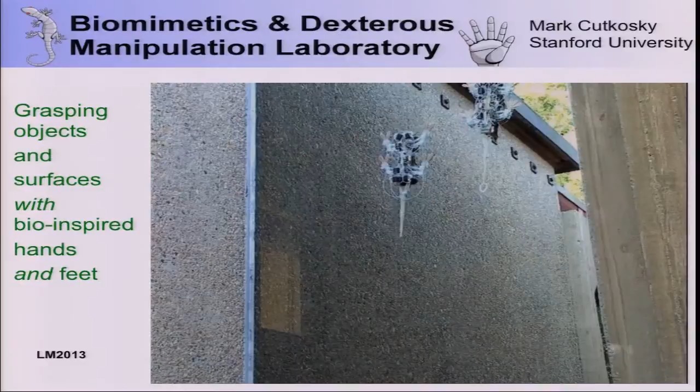Good afternoon everybody, it's my pleasure to kick off the afternoon session. I want to talk today about hands and feet. The interesting thing is that when you're using feet for climbing, it's pretty much the same as hands. It's all about controlling contacts and internal forces, which means you have to do tactile and force sensing, which also means you want to use compliant structures and materials to help conform and control those forces. These are themes that will come up. I don't have time to talk in detail about any of this, but I wanted to show you some recent work we've been doing on hands and feet.

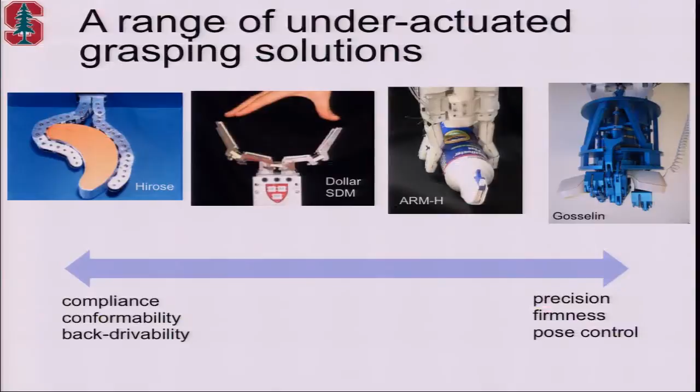We've been involved in some hand projects lately with under-actuated hands. When you look at the spectrum, there are a number of them ranging from very compliant and conformal ones, like Hirose's hand on the far left, to ones that have rigid links but are under-actuated so they can close around an object and hold it precisely. We've also been working on a couple that are in the middle, like the ARM-H hand. I'd like to touch on three that we've been working on.

The first one is with Hannah Stewart, who's in the audience there, and Shiquan, also working with Oussama Khatib. Oussama's already told you about the robot, and we've been trying to convince him that he should call it Ariel, but he wants to use an acronym, so you can help us. I'll tell you a little bit about that hand.

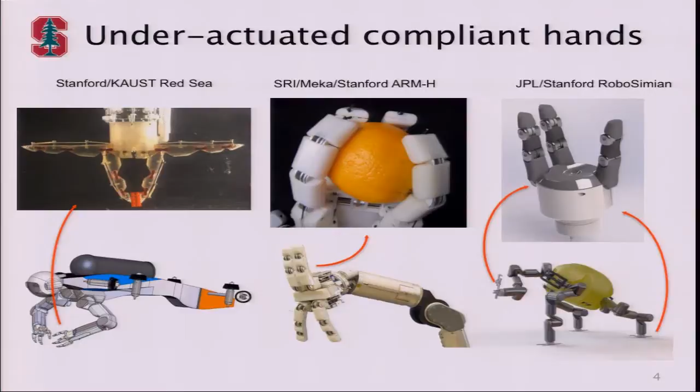Also, the ARM-H hand that we did with SRI and Meka. And then the last one on the right is a hand that we have been working on with JPL for their entry in the robotics challenge for DARPA. Interestingly, they call it RoboSimian. It's sort of an orangutan robot, and the hands are feet.

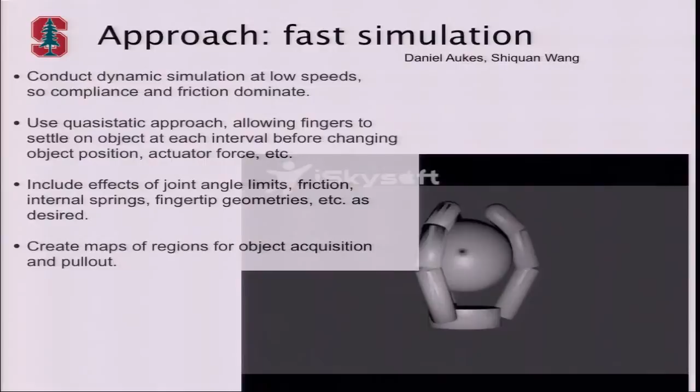The approach we've been taking for our hand design is to do fast simulation at low speed. It's a huge search space - how many fingers, what their properties are, and so forth. We want to include important things like friction, joint limits, and so on. We were able to build up regions of things like: under what circumstances can this hand successfully grasp an object? What is the effect of changing different finger stiffnesses? How much force can we resist if we pull out in different directions? I'll show you a couple quick examples.

This is the ARM-H hand on the right. One of the interesting features is that it has electrostatic brakes, shown down here. They're laminated layers put up at a high voltage so they squeeze together and lock the joint. Brakes are nice because they're much more compact than motors for the same torque. It allows us to have a single motor for each finger and yet still have some of the dexterity you might otherwise expect from a fully actuated hand. This video shows the ability to grasp by first releasing and then locking up the brake so that it sucks the object right in.

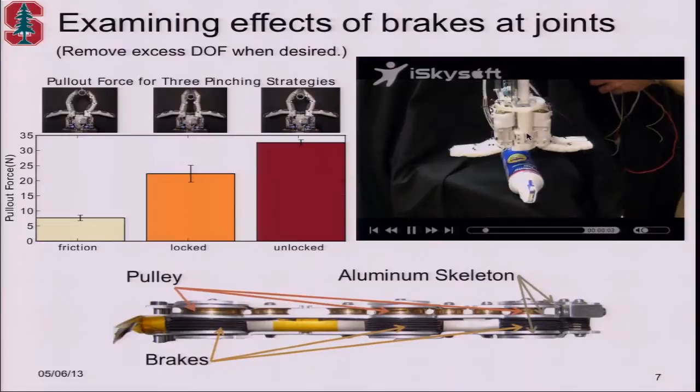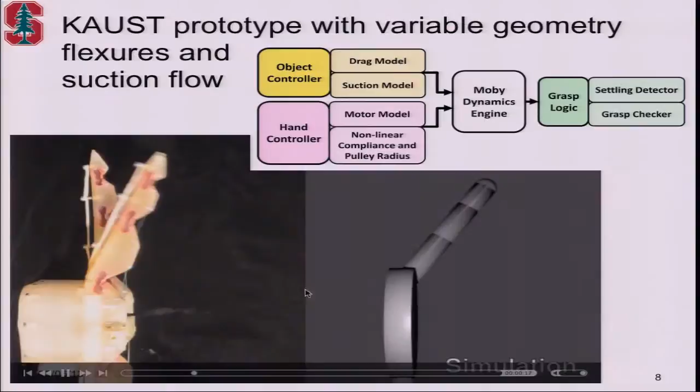The next slide I want to show is a hand that Hannah's been working on with a couple of other students - Shiquan has been working on the modeling. It uses flexures because it's easier to make them waterproof. The modeling shows the advantages of having a non-constant geometry of the tendons so that we can get the fingers to curl in.

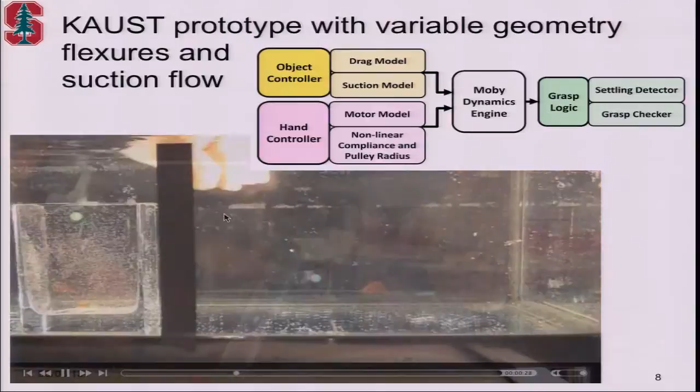The other thing that turned out to be a big help with this hand is adding suction. When you're trying to grasp something underwater, the motion of your hand pushes a little bit of water ahead of it, which tends to push away the very object you're trying to grab gently. But if you pull a little bit of suction - this is not like an octopus sucker, it doesn't require making a seal - just a very gentle suction can make all the difference in terms of being able to grasp soft and slippery objects.

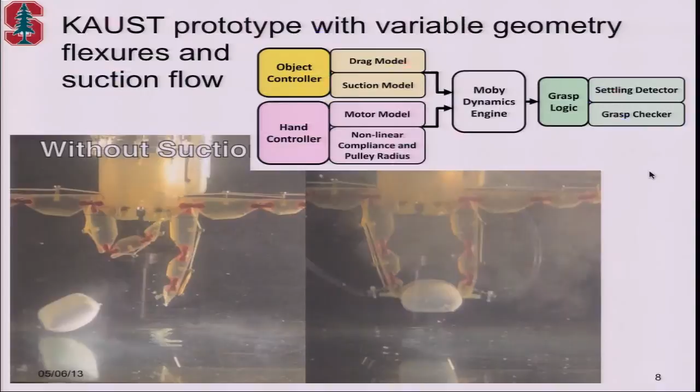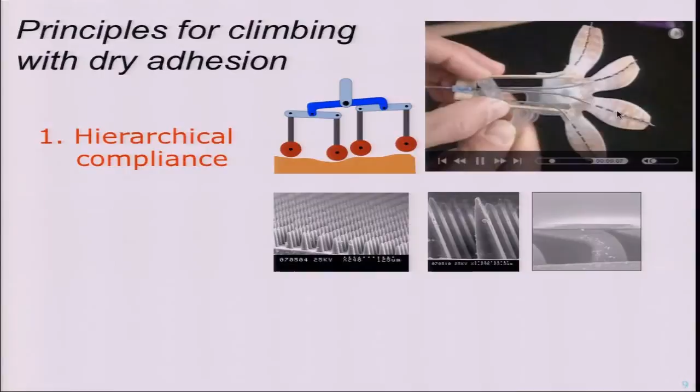You can see here that the soap bar is just a lot easier to grab with a little bit of suction. Feet are almost the same thing. Once again, they're under-actuated. They have to conform to surfaces and distribute forces. In just a couple minutes, I want to say a word or two about that.

Even the gecko has to worry about controlling internal forces. That's why when they're going head first downhill, they have to turn their feet backwards, or otherwise they would fall off.

So what we've been doing most recently with adhesion is what I call dynamic surface grasping. My inspiration here is the colugo, gliding and grasping a tree. We've been working with a number of investigators, Vijay Kumar's group at UPenn, and most closely with Sean Humbert at Maryland.

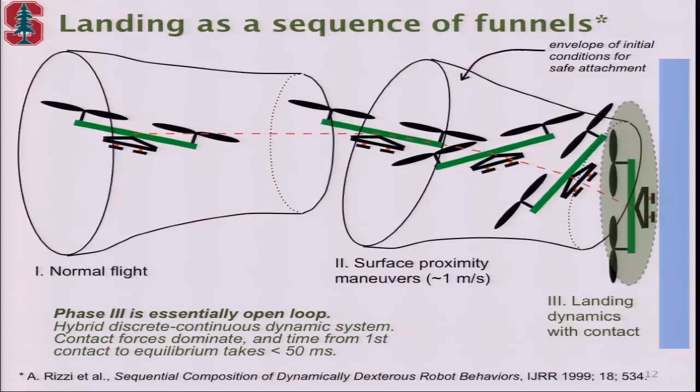On trying to get quadrotors to land and perch on walls and ceilings. Their problem is to control the quadrotor in phases 1 and 2. Ours comes in phase 3, the final stages of this flight. As soon as you make contact, those forces really dominate the dynamics. It's very fast, about 50 milliseconds.

And so we need mechanisms that will let us align the quadrotor and grip. Here's just a quick video of one.

It's too bad I need this. I should show you the sound because it sounds like an enraged mosquito. It's okay, never mind, there we go.

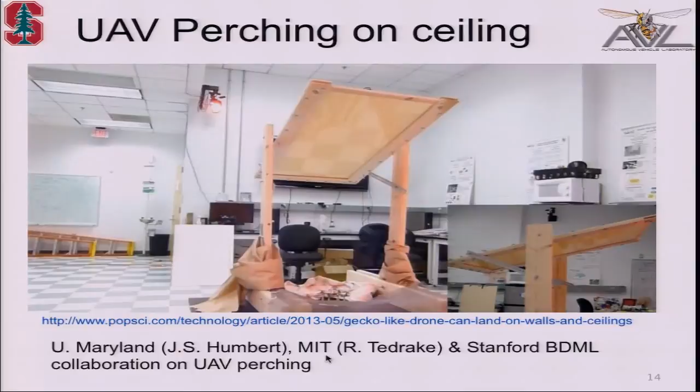The only thing I don't like about this video is it makes it look easy, like the thing just has chewing gum on its head. But actually, it's a fairly complicated process.

We come in, we may be misaligned, so we have outriggers to align, and this means we want a small polar moment of inertia. We absorb the excess kinetic energy and use that to compress a structure internal to the mechanism. That's what loads the adhesives and then allows these adhesives to grip.

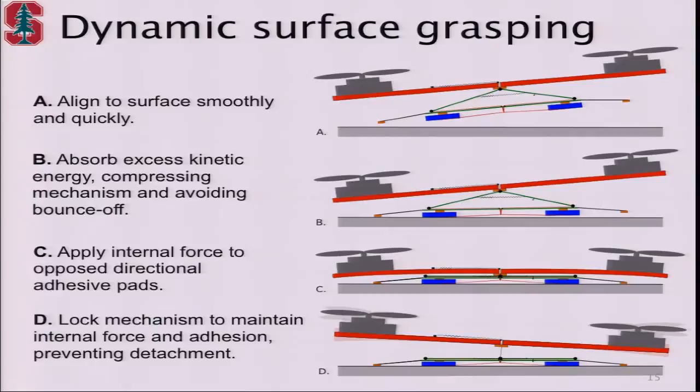And then at the end, we have a little latch. We release that, and we have enough energy to pop off, and you can start flying again. We're doing a lot of work with dynamic modeling, verifying that these things will grip under the circumstances that we predict they will, and also trying to make that envelope bigger.

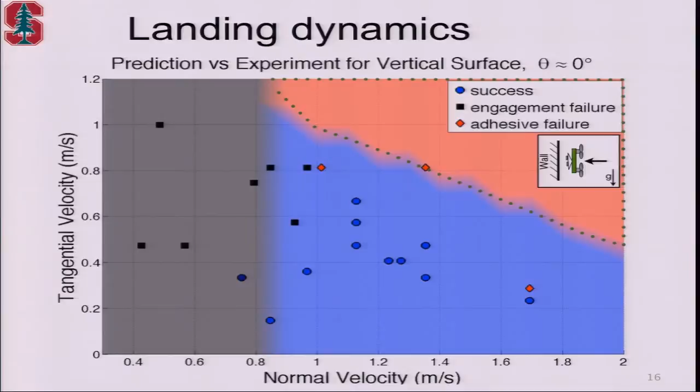In particular, let's look at this part of the envelope in the upper right. That's adhesion failure, one of the modes. And that really requires looking in some detail at what the adhesives are doing.

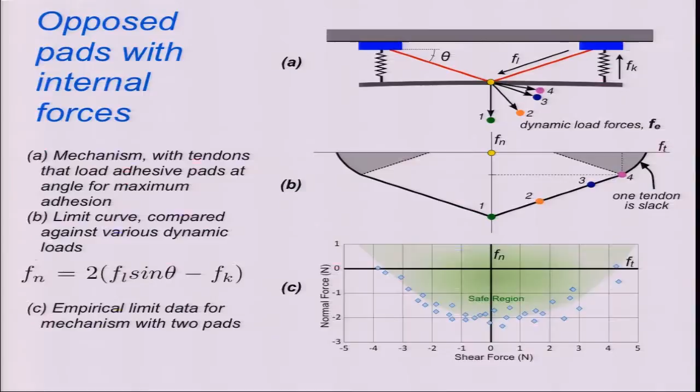So we have two opposed pads here, and we're pulling on them with tendons, and that means that we have a kind of a limit curve, shown by the blue empirical dots, the range in which we can pull forces and still sustain the contact. As you can see, the limit in the best case is around 2 newtons for this little gripper.

And that has interesting implications for the springs. It turns out that it means there's a big reason to use nonlinear springs to get maximum energy absorption in a tight space. There's not going to be time to go into detail on that.

Okay, let me finish with one last thing. How do we grasp objects in space? So we have a big problem with space debris. There have been satellites destroyed by space debris. There's the movie Gravity that just came out, in which that plays a role.

When I first heard about this, it sounded like science fiction, and I vaguely remembered that there was a James Bond movie in which the bad guys had come and indeed they had grasped an object in space. What we would like is something a little less cumbersome and ferocious looking than that.

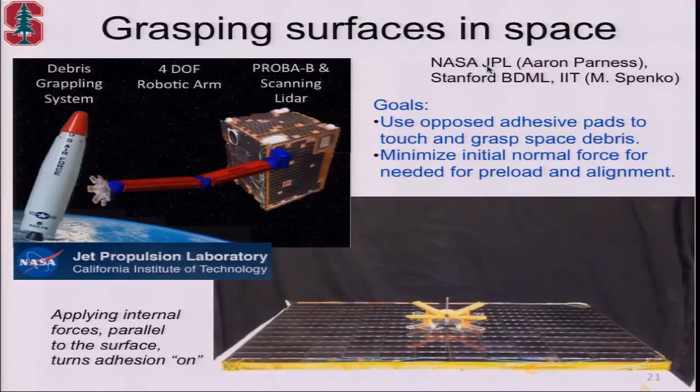The idea is that you have a satellite with an arm and with some of these gecko, I don't know if they're feet or hands, whichever, that grasp the object and allow you to reel it in. I should also point out that Allison's group is working on this, and we've been collaborating a bit with them as well as with Aaron Parness at JPL on space gripping.

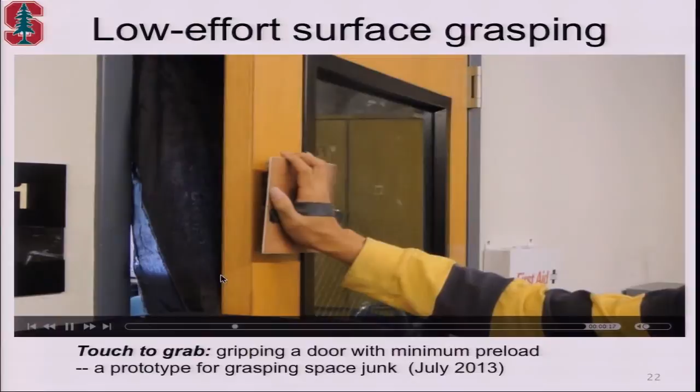And this is the last slide. The real trick is that you want to grasp things with very low force, because just like trying to grasp things underwater, you don't want to push them out of the way. So here they are in space. You want to latch onto that surface and grip it. You can't push it, because then you just send it off into another orbit and things are worse than ever. So grabbing with very low effort is an important thing, and this is demonstrating a low effort gripper.

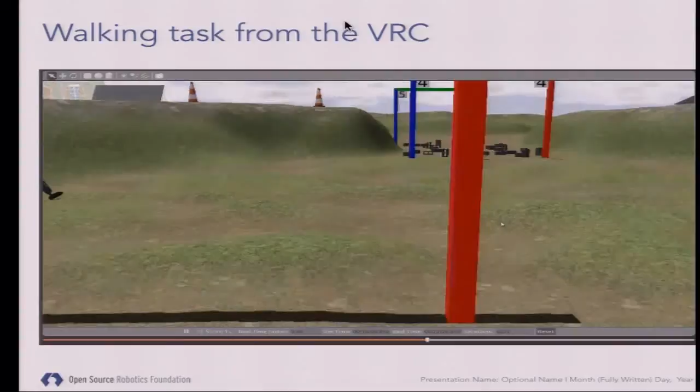This is just a rendering from some of that. There's a nice rubble pile up there to avoid.

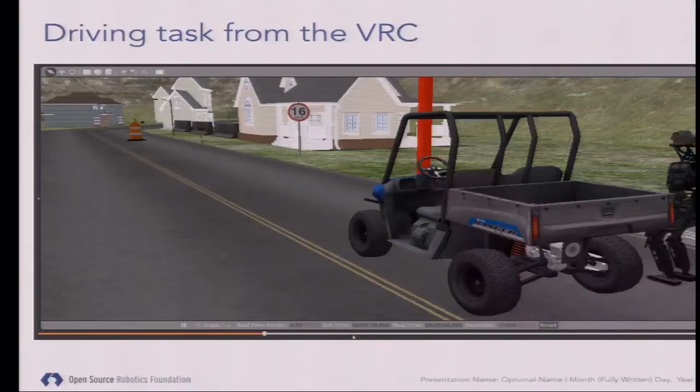I'm going to skip through because I'm going to do a live demo. And this is a fun one. We hear a lot about robotic cars, but here the task was to put a humanoid robot inside of a car and drive it.

Right. It's probably the easiest way to do it. This is how I get into my car. I don't know about you.

Say there's a fire that breaks out, that's a time critical situation. Say you have a water truck, it's not an autonomous water truck, but you'd still like to be able to use it, if say there was radiation as well. There were a lot of fires at Fukushima, so firefighting is one of the things that they were focusing on. So that's kind of the justification for this type of thing, even though it seems a little silly. It is cool, but it's also potentially useful.

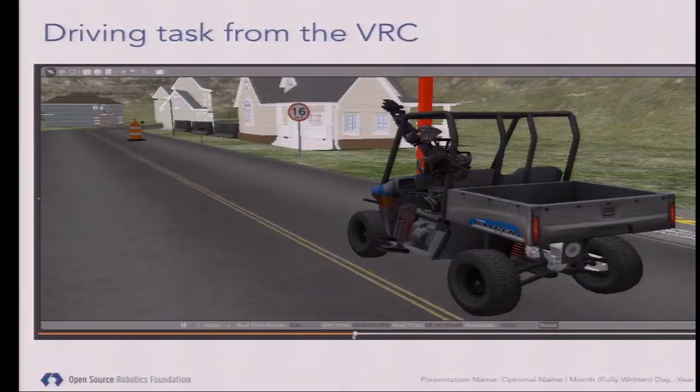So these are some scenes from the VRC, the Virtual Robotics Challenge. And now I'm going to talk a little bit about Gazebo, which is the simulator. That's what I work on.

So one of the things that I'm working on is adding support for more physics engines. It initially used Open Dynamics Engine. We're adding partial support for bullet physics, and we're also adding support for SimBody, which is from Stanford, and DartSim, which is from Georgia Tech.

Now, key buzzwords for the physics engines is using Featherstone's algorithm, which can give much more accurate solution of the constrained rigid body dynamics. And also regression tests. We're putting in tests to verify that all the physics engines are working properly and that they all have the same interface.

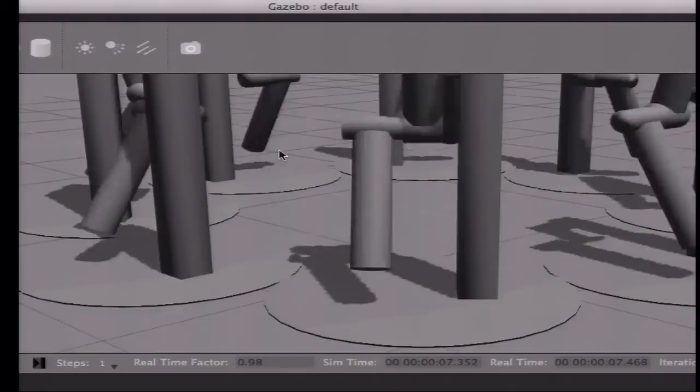Traditionally, you've needed Ubuntu with a GPU to run Gazebo. We have partial support for Mac, which I'm going to demonstrate right here. Okay, let's see if we can full screen that.

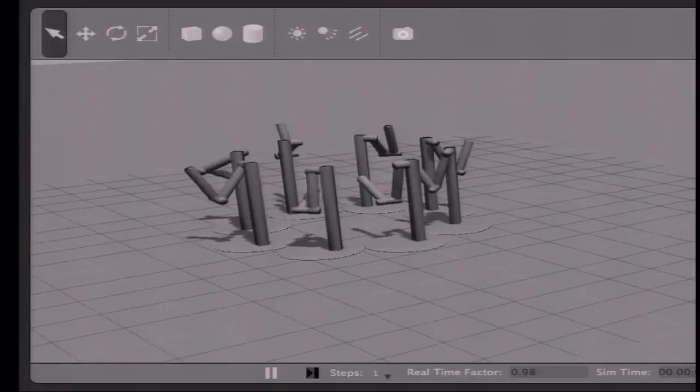So this is just, I see this all the time, an array of double pendulums swinging around. It's pretty normal. And in your scientific quest for knowledge, sometimes you just have to try things out.

Morgan wrote this script.

So yes, we have partial support for Mac OS right now, which is the point of that. And now I'm going to show you a demo of our cloud, some of our recent cloud interfaces, which are very cool. So because using Ubuntu, using these high-power Ubuntu machines, not everyone has them, and so forth. But with the cloud, you can get a machine.

Can't talk and demo at the same time. Whoa, that's not good. That's not good either. Okay, we'll approximate it like that.

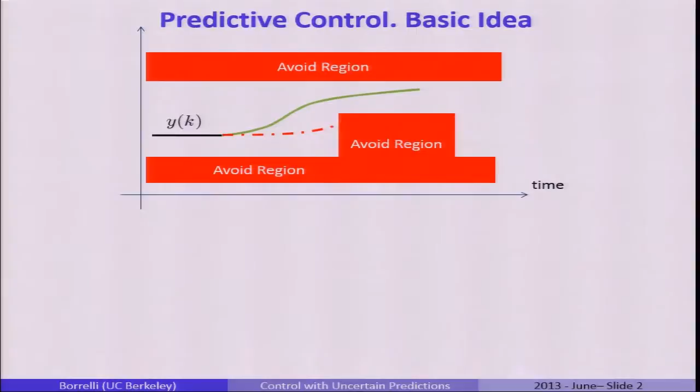So we study predictive control. Very simple idea: you want to control a trajectory of a system. You have some regions you want to avoid because of the inertia of the system, because objects are moving. You want to make a forecast. Otherwise, instead of following the green trajectory, you follow the red trajectory and crash with the obstacle.

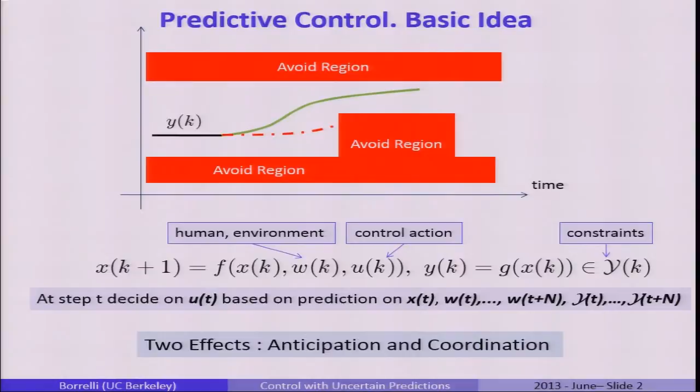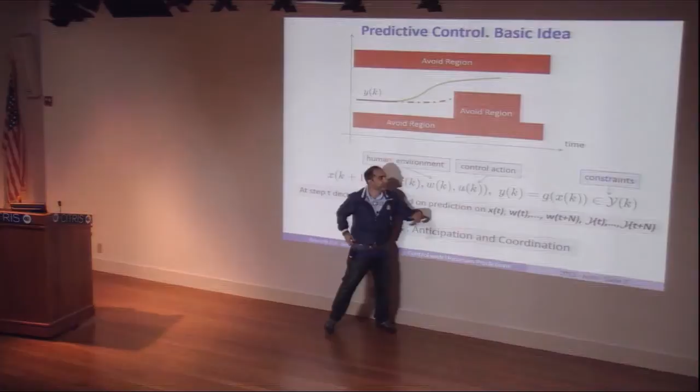So the most simple mathematical formulation of this: you have a dynamical system, which has a state. You have control over certain inputs, and there is environment and humans around you that you don't control. So at time t, you want to decide which control action to take based on forecast of the environment and the humans around you. There are predictions in there, and the conjecture is that because of the inertia, because of the dynamic scene, without predictive control you are not able to solve complex tasks. So this is my first message: model-based systematic control is the choice for complex systems.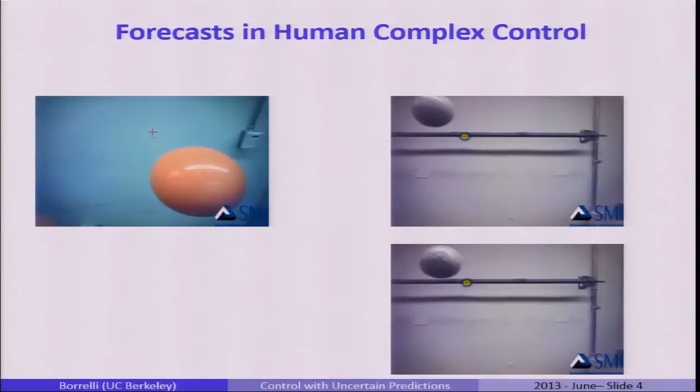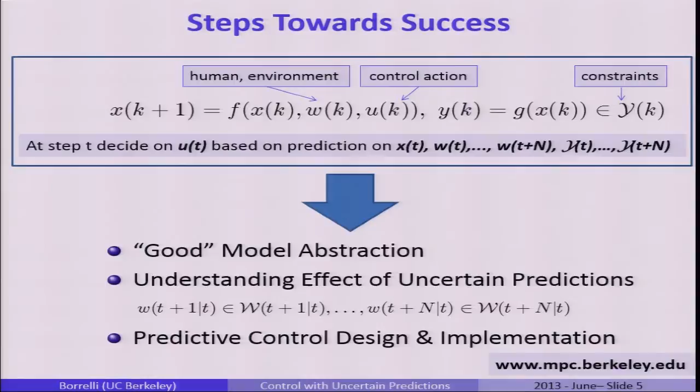Okay, moving forward, what do we study in my lab? What is a good model abstraction for doing predictive control? What is the effect of your forecasts? Your uncertainty about the future belongs to a given set. You have probability distribution functions, and you want to understand what is this effect in feedback, and how do you design a predictive controller. I'll spend one word about this.

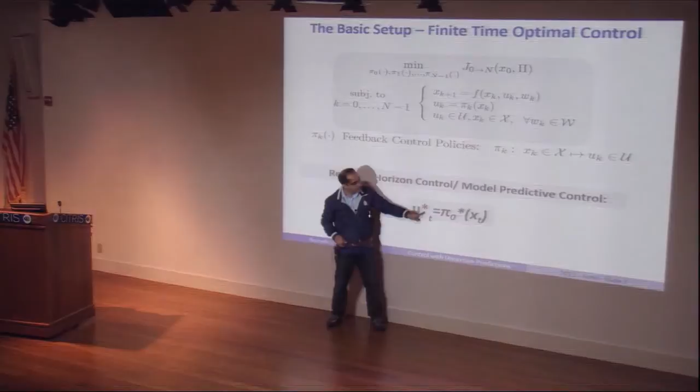The simplest formulation, I don't have a pointer here, but you basically are looking for a set of feedback policies over a horizon, pi 0, pi 1, pi n, that minimizes certain costs, respects your system dynamics, and satisfies your state and constraints. Okay? So the simple predictive controller, receding horizon controller, look-ahead controller, is basically telling you: take your state, apply the first feedback policy you have found, this will be your best action, and repeat and resolve the problem again.

So second message for today: this simple concept, and many of you have seen in one form or another running this, can be implemented and works. Today, for instance, if you have a simple steering control problem, you want to steer and apply differential braking to a vehicle, and you have a bicycle model, you have uncertainty about the longitudinal speed because the driver is acting on it.

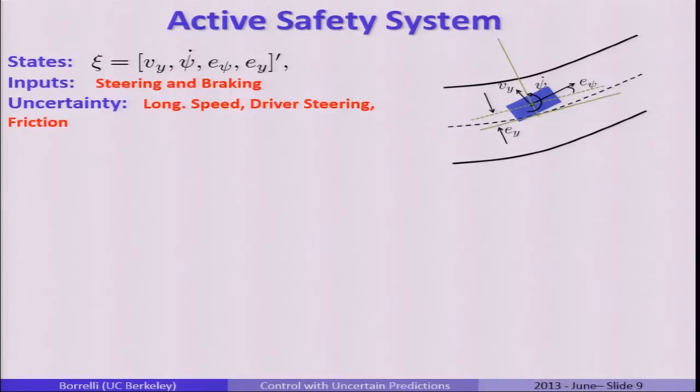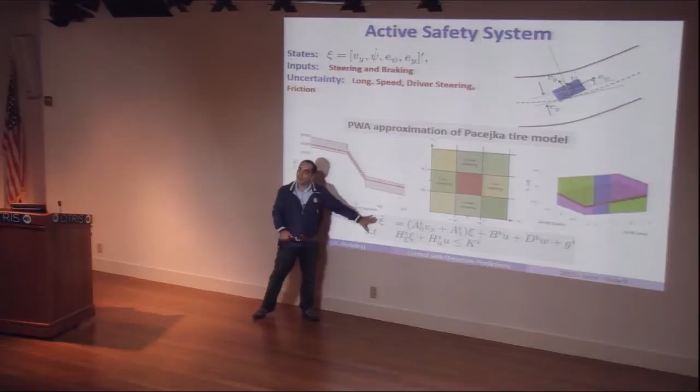You have uncertainty about the driver steering, so you have an additional action on top of what the driver is doing. You have nonlinearities coming from the nonlinear tire curves of the vehicle. What you can do is approximate them, write down a set of piecewise affine differential equations, and if you have the right tools, in a couple of hours you end up with a predictive control algorithm that does this maneuver here, which is very difficult.

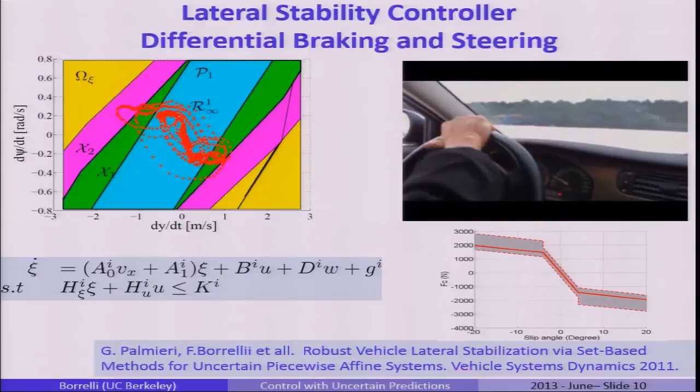So the driver thinks he's actually steering, going high speed on ice. Really, he's doing this only because of the controller. So he only sets his control input, but actually the controller, if there was a camera looking at the vehicle, the wheels are counter-steering, going in the opposite direction.

This works also on self-driving cars. I'll spare you the nth video on self-driving cars.

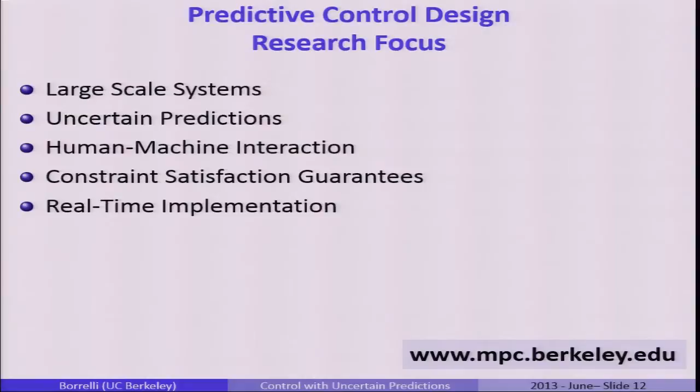To summarize, for people that know me: large scale, we study predictive control, and my lab focuses on large scale systems, uncertain prediction. You will hear from Theresa about human-machine interaction, constraint satisfaction, real-time implementation. What is new? I want to tell you a few words about real-time implementation, so fast optimization in real time.

This is the general problem we want to solve, and in general it's very complex. Many of you have tools or tricks for making this faster. The simplest trick is, instead of looking for all possible feedback policy, you select a specific class of feedback policy, maybe a special trajectory, polynomial trajectory, linear gains, and so on.

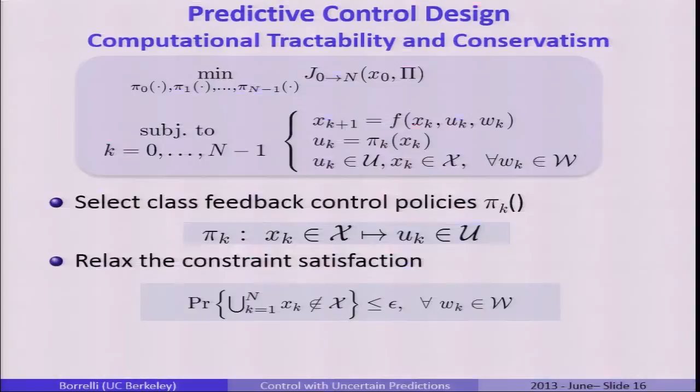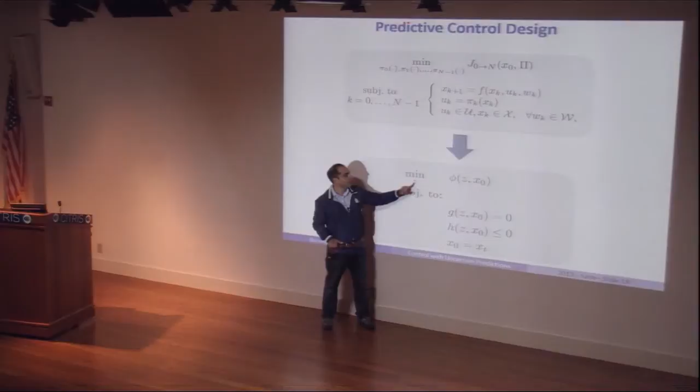The second one is, enforcing the constraint that the state is in a certain region for all possible uncertainty - what you do is relax this constraint and allow the probability of violation to be small. The third one, to make this faster, is to exploit the solution of the resulting optimization problem. Meaning, from here, you end up with a nonlinear program where you have to look for a variable that minimizes your cost subject to your constraints, and the state that you update in real time is a parameter. So we're trying to study ways of making these problems faster.

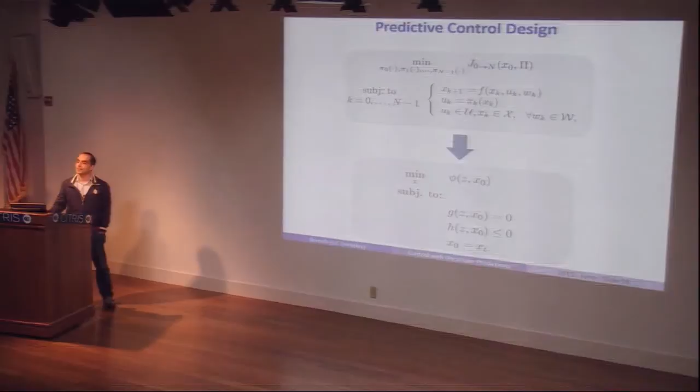One way, you can download from the web, is BLOM. BLOM stands for Berkeley Library for Optimization Modeling. It's work of Anthony Kelman, Jason, and Sergey. From Simulink, if you have your dynamical model, you can put your constraints, your cost function. With the click of a button, it generates a predictive control that you can download on your embedded platform. So BLOM has many interesting things in there.

The third message for today is that if you ever want a fast nonlinear predictive controller for a large-scale system, try to use BLOM. It actually works really well. We have tested this under thousands of variables, solves problems in the order of minutes.

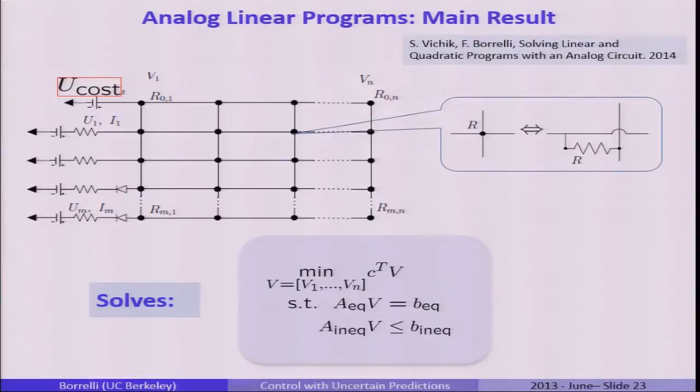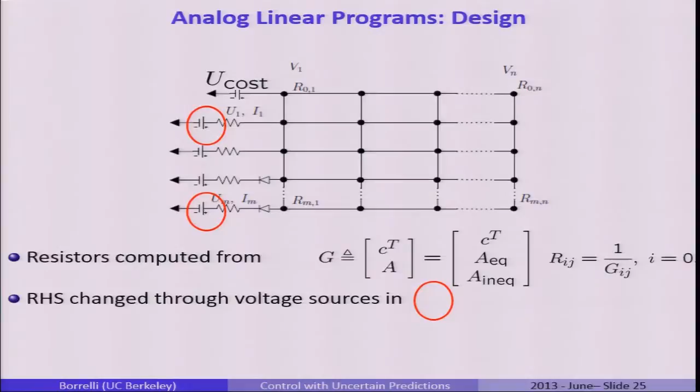The resistors are here, the resistors are a function of your equality and inequality constraints. The idea of the circuit is that your forecast, your state, enters the right-hand side of the constraints, and you do this by just changing the voltage to this circuit. And the neat thing about this circuit is that it only has resistors and diodes, okay, and external sources.

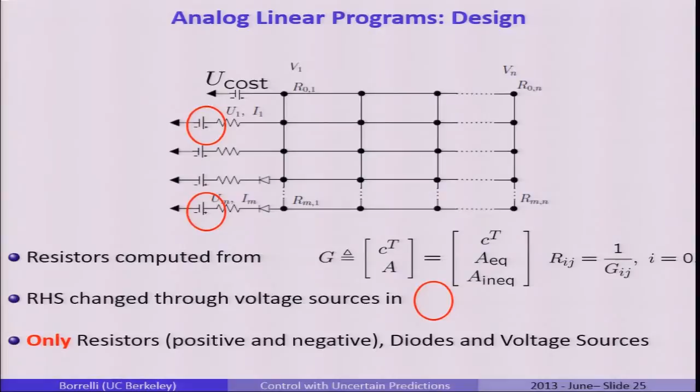So why this works and how it works, I'll skip. But the idea is that once you write down the equilibrium point of this circuit, these are the KKT conditions of a linear program.

Sergey has been working on this for the past 2 years. There was work in the 60s about analog optimization at Berkeley, but the circuit was too complex and very difficult to implement. What we have been doing, the circuit that Sergey has designed, is much faster and simpler.

It's also been extended to solve quadratic programs. Final message today is that if you want to solve a fast linear quadratic program in the order of nanoseconds, you can use an analog circuit.

These are results with SPICE: a linear program with 10 centimeters of wire, 200 nanoseconds for 100 variables. There's a predictive control example on the right-hand side. If you go now to 45 nanometer CMOS, you can have a 10 variable linear program solving in the order of 5 nanoseconds.

If you have a linear program or a quadratic program you want to run fast for your robotic application, we'd be happy to design a circuit for you and test it. This was my last message. The future of computation will be mixed analog digital, and as any prediction has a probability less than 1 to be true, so maybe.

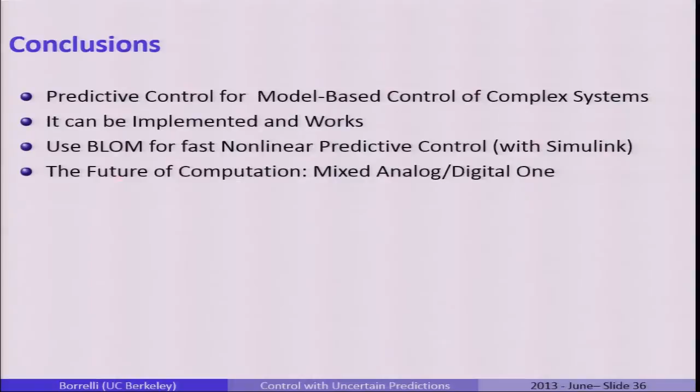So this concludes my talk. Four main messages: we study predictive control, and it works. If you have a large-scale nonlinear problem, try to use Blom. If you have a small, very fast optimization problem, talk to us—maybe we can design an analog circuit. And Theresa will talk about more interesting work on the human side.

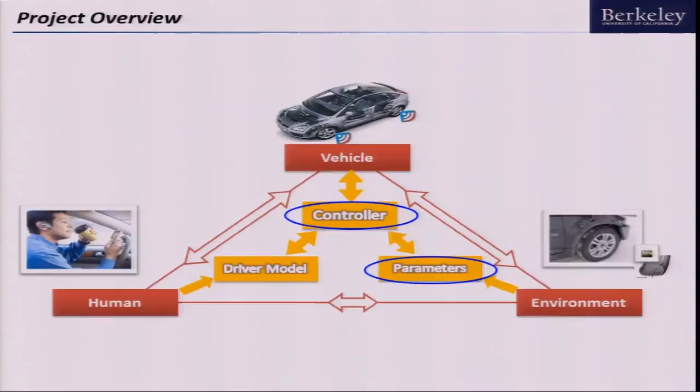I'll mainly talk about the controller and parameter identification. The controller design team made a lane keeping system which can also avoid an obstacle simultaneously. They combined steering and braking as control input to correct the driver's steering, using model predictive control so they can predict the future motion of the vehicle, and they also incorporated the driver model in predicting the vehicle's motion.

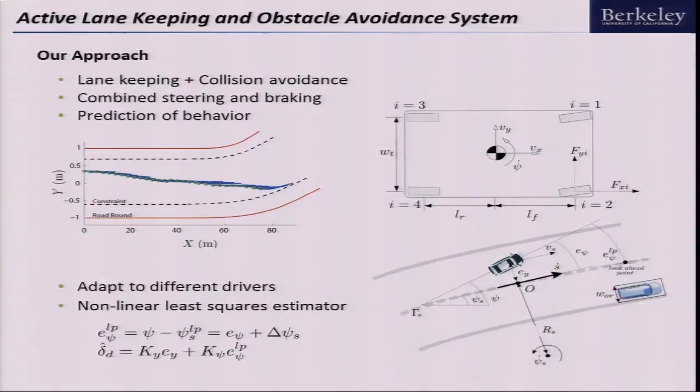At the bottom you can see the simple driver model. The prediction of the driver's behavior is represented by their steering angle, delta D, which is calculated with a combination of the distance of the vehicle's center of gravity to the center line of the road, and the error of vehicle orientation with respect to the road tangent.

The other team is working on vehicle inertial parameter identification. Vehicle inertial parameters such as sprung mass, yaw moment of inertia, and position of the center of gravity can vary under different operating conditions, such as different numbers of luggage and passengers. So we want to estimate these inertial parameters, and we made some algorithm.

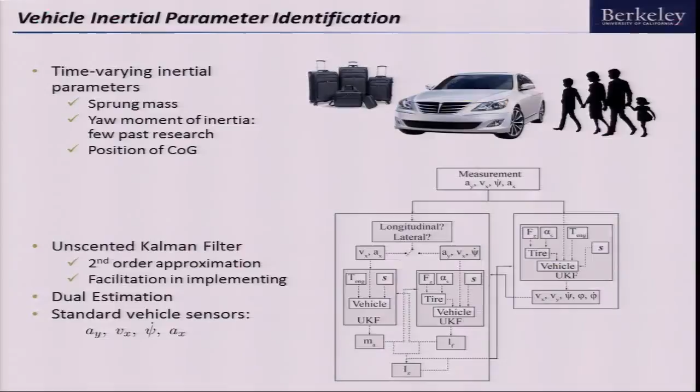In the estimation algorithm, we use an unscented Kalman filter, and we adopt the dual estimation architecture. We also want to use only already commercialized standard vehicle sensors—lateral acceleration, vehicle velocity, yaw rate, and longitudinal acceleration. We don't use any advanced sensors such as GPS.

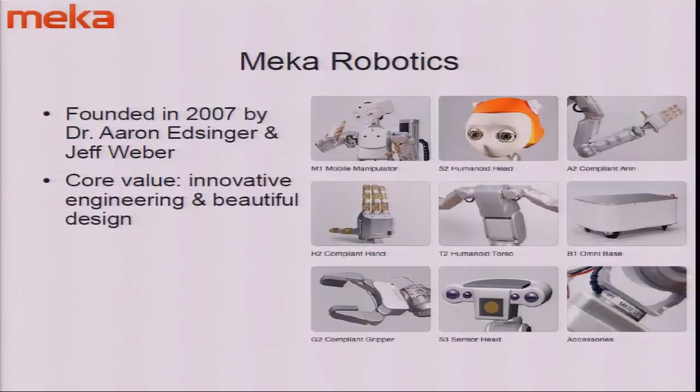In addition, what Meka as a small company is able to do is customize their products to the specific needs of different research labs, whether it's building on their expertise with series elastic actuators to make an agile biped, or adding specialized sensors that you might need. And I'm probably the third person now to have a rendering of the Red Sea project, and I'll talk more about it in just a little bit.

So now I'll walk you through a number of different examples of how academic labs can collaborate with small companies. Here's the simplest example: academic labs can actually provide bootstrap financing for these small companies.

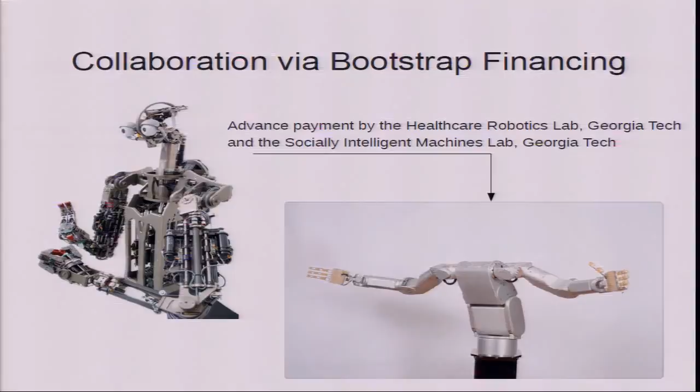As an example, Meka got started when two labs at Georgia Tech, the Healthcare Robotics Lab, where I did my PhD research, and the Socially Intelligent Machines Lab, provided an advance payment so that we could get these arms. That really helped take Domo, which was Aaron Edsinger's PhD thesis, productize it, and give these two labs at Georgia Tech arms that we could use for our research.

And this is different from other examples we've seen today in that Domo was not ready for venture capital. It's not a product, but it's something that academic research really needs to get started.

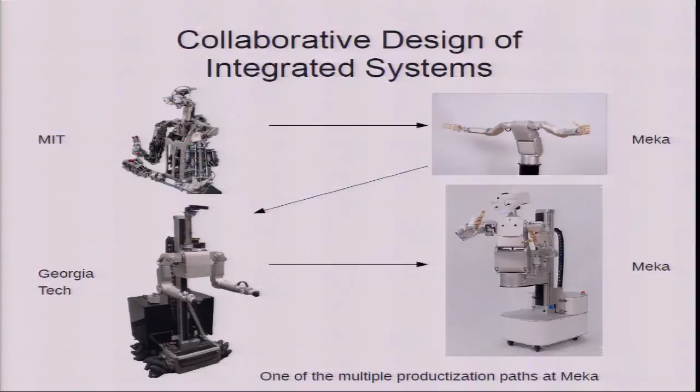Another example is that a lot of research labs are focused on software and systems. Certainly was the case for my lab. And we need new sensors to do our research. Example being here, whole arm tactile sensing. That's not common right now on robots. That's not something a lab that focuses on software does, but it's really useful for the lab itself.

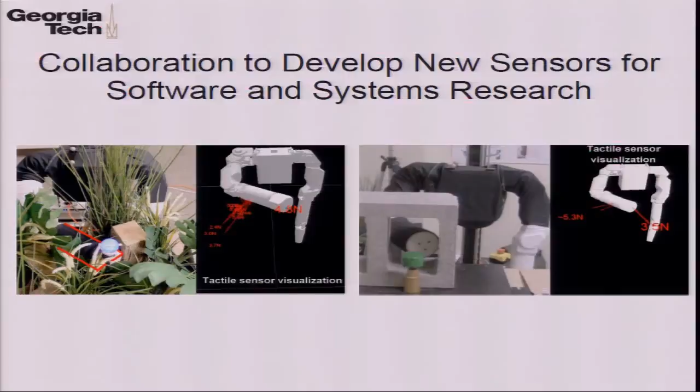This is where Meka filled in a role that research labs really cannot do. Meka took research from BDML, which is Marc Cutkosky's lab, a proof of concept design for a tactile sensor, productized it, worked with Georgia Tech to make software drivers, and then really delivered us the sensor that we could use in our research. Without Meka sitting in between these two academic research labs, the technology couldn't really have flowed from one to the other.

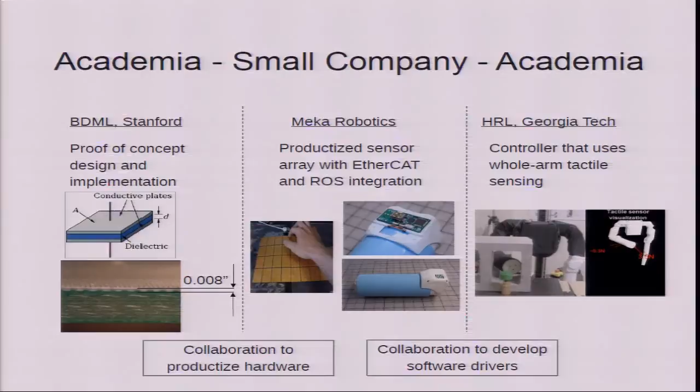Now, again wearing my researcher hat, this truly is just the beginning. Everything that we've shown, all the software, needs to be tested with more people, in more environments, with more robots. Everything from sensors to robots to user interfaces can be faster, simpler, smarter. And we'd really like to kick off the next generation of robot hardware, whether it's cost being reduced, making them more compact, lighter weight, or having better sensors. That's where companies like Redwood and others can come in.

Just one slide on Redwood. Three founding companies for us: Meka, Willow Garage, and SRI. It's really taking this idea of human-safe arms that can work next to people and moving it from research, which is Domo on the left, through the Meka products, specifically for academic research labs, to something that can be used by industry for manufacturing.

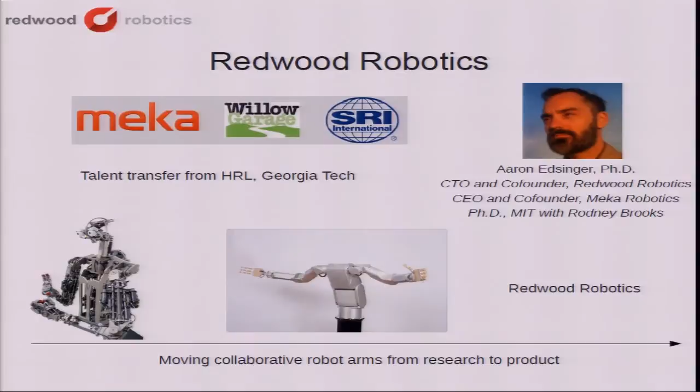All right, so today I'm going to talk about a data set we're collecting. It's a large-scale 3D data set of object instances.

But first, I'll talk about how computer vision kind of works today. So you train and test on data sets that are essentially collected from the internet, like ImageNet. You search the internet for images, categorize them, and that's the data set. There's been significant progress using methods like deformable part models, deep learning, and many more. Good performance on localization of objects in these data sets is kind of like 70% or 60%. However, these methods aren't directly applicable to robotics.

So why is robotic perception different from traditional computer vision? One key thing is that you need nearly perfect performance. 70% is definitely not good enough, and as Kurt said earlier, 99% might not even be good enough depending on your environment. The other thing is that you need poses. For robots, you're usually going to want to interact with something, and in order to do that, you need good, accurate pose estimates of the objects.

So for robotic perception, we might need to change the problem a little bit from what those other data sets are trying to expose, to enable robust vision. First, rather than trying to recognize everything in the world, everything on the internet, we'll restrict the set of objects we're going to work with, because a typical robot might work with maybe a few hundred or 1,000 objects or something.

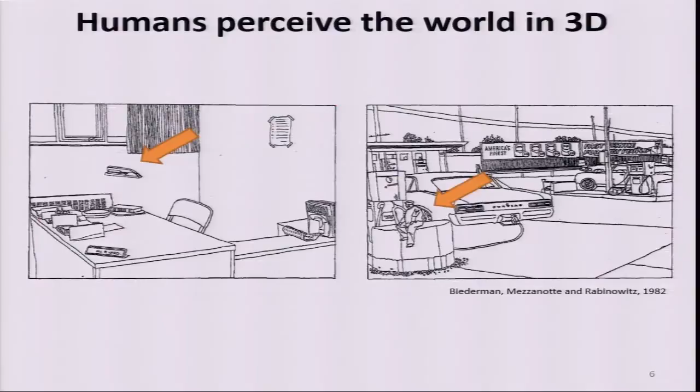These are typically described in terms of location, size, and support. Researchers have shown that when those relationships are violated, subjects were recognizing those objects much less accurately and much less efficiently than otherwise.

Computational neuroscientists have also looked at this problem and recognized the importance of these integrations. They've shown that from V1, where low-level visual processing takes place, there are two main computational pathways: the what pathway to the ventral stream where objects are recognized, and the where pathway through the dorsal stream where space is perceived. They believe these two pathways converge into an area called the prefrontal cortex, where object and space are understood in a joint fashion.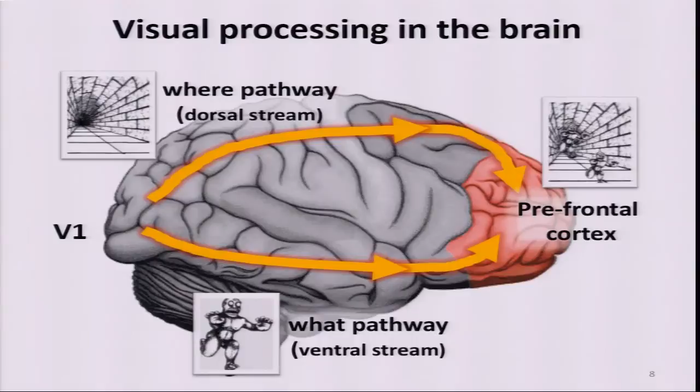In vision, researchers have worked mostly in two main areas: reconstruction and recognition. Most of the time these two problems have been handled separately. People either try to obtain accurate metric reconstruction of the world, or extract semantics. What I advocate in this talk is that it is critical to solve these two problems jointly, toward the goal of perceiving the world in a true 3D sense.

I'm going to describe three ingredients which I believe are critical for solving this problem: the ability to model objects and their 3D properties, the ability to model interactions among objects and space, and the ability to model the relationship of objects and space across different views.

Let me start with the first ingredient. What we want to do is not only recognize and detect objects in an image and describe them as a bounding box, but also associate geometrical properties, such as the distance of objects, the pose, and the 3D extent. In my group, we propose models for recognizing objects which allow us to capture the intrinsic multi-view properties of object categories.

We propose to describe objects as a collection of parts which capture diagnostic appearance information for the object category. These parts are connected together into a graph structure where each edge captures the relative position of one part with respect to the other. We have shown that it's possible to learn these parts and this relationship automatically from training data.

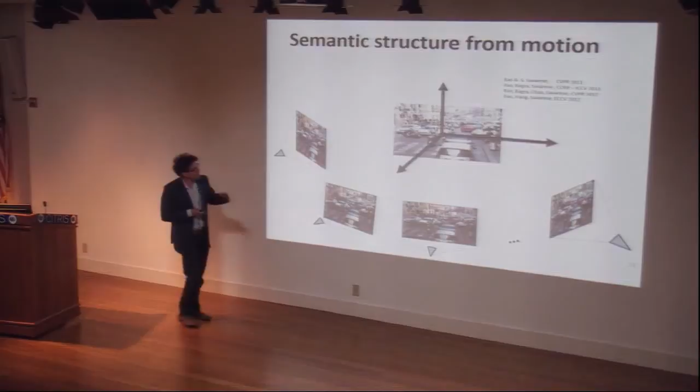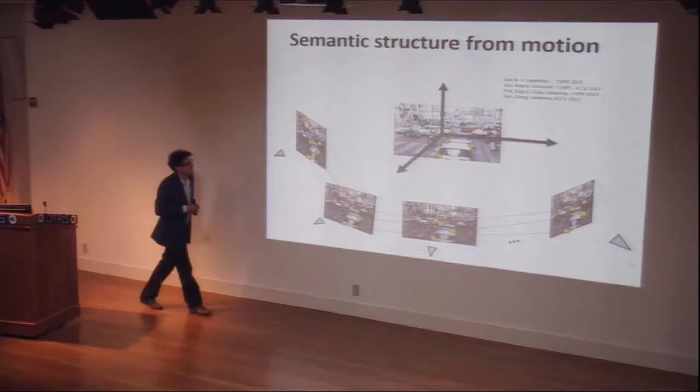We introduce a novel framework which we call semantic structure from motion, generalizing the typical problem of 3D reconstruction, known as structure from motion or SLAM, depending on whether you have a static sparse set of images or a video sequence. Traditional structure from motion tries to find feature matches across views and use those to recover the scene as a collection of 3D points, as well as recovering camera positions. What we do is not only solve this problem, but also inject semantics, recognize objects, and find their relationships across views to localize them in 3D space, all in a joint, coherent formulation.

Here are examples from a number of images observing the scene from different viewpoints. We solve standard recognition problems like segmentation and detection, but also localize those objects in 3D—what we call semantic reconstruction. We localize objects and scene elements in 3D, as well as estimate the position of the observers. Notice this is done from views that are completely uncalibrated—we don't know anything about them, and there's no actual 3D information from a sensor, no LiDAR or Kinect observing those scenes.

This is another example. We have a sparse number of views observing the scene, and here we see the corresponding semantic reconstructions.

In conclusion, I want to emphasize that it's critical to model the interplay between semantics and space for perception. For more information, you're welcome to visit our webpage at Stanford. Thank you.

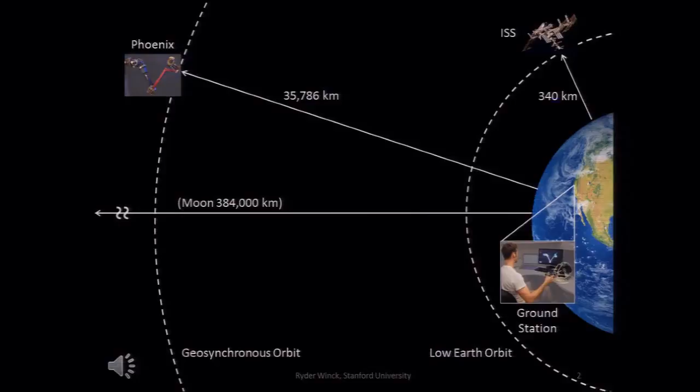My name is Ryder Winck, and I'm going to talk today about time-delayed teleoperation for robots in outer space for satellite repair. The goal is we have a robot in geosynchronous orbit, and we want to control it from a ground station on Earth about 35,000 kilometers away. There's about a half-second time delay due to the distance of communication to and from geosynchronous orbit, but then there's a multi-second delay caused by pre- and post-processing of the data. Since Oussama mentioned applying underwater robots to space, I'd like to say we could also apply this to robots underwater.

Moving on, our approach is essentially to have the human interact with a virtual model of the robot that's in outer space and of the environment. The human sends commands both to a virtual robot and to the real robot in space, and we update this model based on feedback data. Today I'll focus on our model of the environment, how we update it, and give feedback to the operator. We want to give both visual feedback and haptic feedback, but in order to do that, we want objects in the environment that can move.

So when an object is in free space, we take delayed data from that object's state that we get from space, delayed due to distance and processing. We propagate that state forward in time and present it to the operator to remove the time delay. We take that predicted state and test it to see if we're in contact with the robot.

If we're in contact, we switch our environment model to a local-only model that doesn't take in delayed feedback but runs only locally, so we can do all the contact mechanics fast enough to provide haptic feedback. So we use this as long as we're in contact.

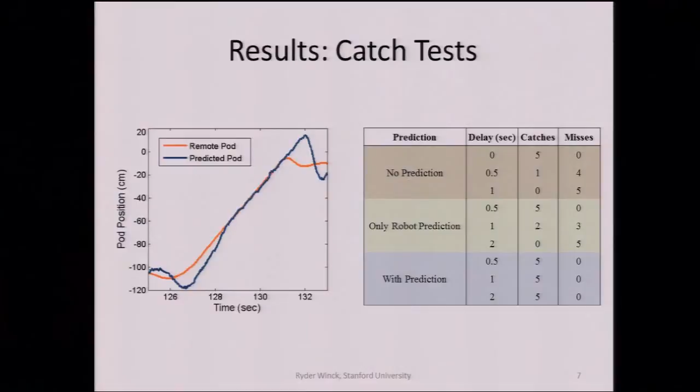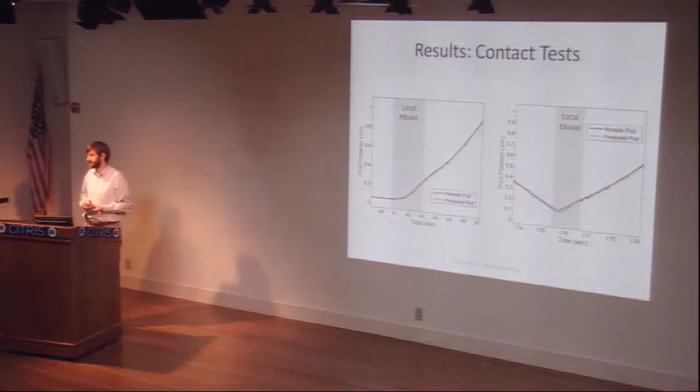So thanks a lot for your time, and here's just some of the other collaborators on this project.

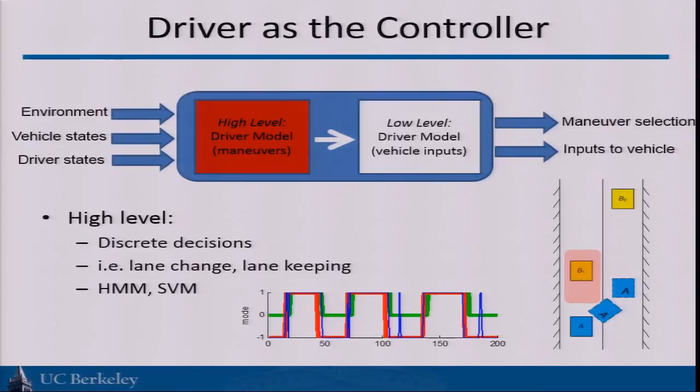So you can do such estimations using hidden Markov models or support vector machines, and you basically switch between different modes of operation, such as that diagram over there, which is just one simulation of a prediction on a model trained on data. So this is a high-level decision-making process.

After the driver decides he wants to change lanes, he executes lower level control, manipulating the steering, braking, and accelerator of the car to achieve this lane change or lane keeping maneuver. On a lower level, it's continuous decision making, the car is getting continuous feedback, and you can use very simple state feedbacks or switch systems to model this process.

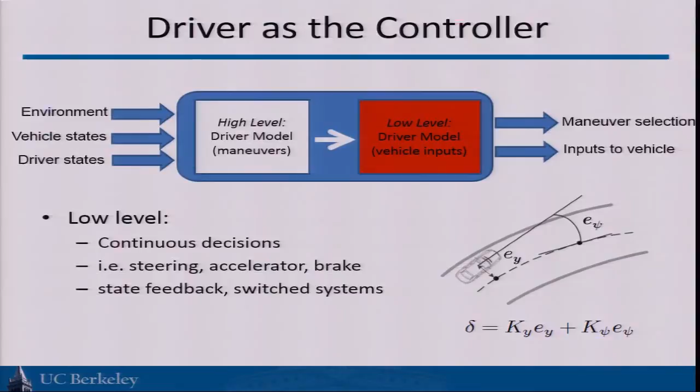So in the diagram over there, that's a very well-used model called a preview point model in lane keeping. Basically you just minimize the error between the position of the car and the center of the lane, and also minimize the heading angle errors.

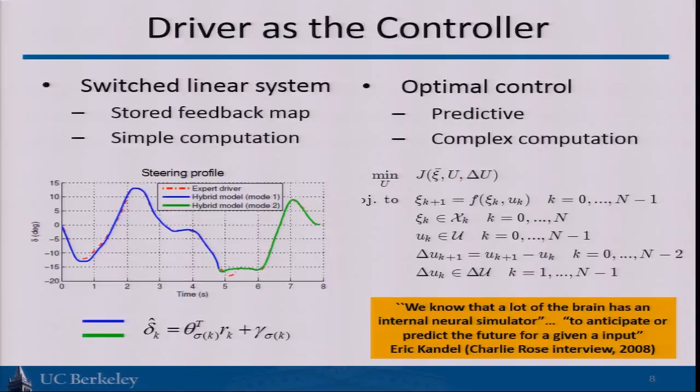On the right, you have a more complicated model because here we're saying we're trying to model the driver as a predictive kind of controller. The driver has some representation of the environment, and some kind of model of how the dynamics of the vehicle would propagate if he were to apply a certain control input. Then he solves the optimal control problem, much like model predictive controllers.

So those are just two different ways, and you want to ask: when does the driver use the simple model, and when does he use a more complicated model where he actually makes predictions?

So those were just models taken from information from the vehicle. You basically take all these vehicle states and steering angles, try to come up with an input-output relationship, and come up with that black box in the middle.

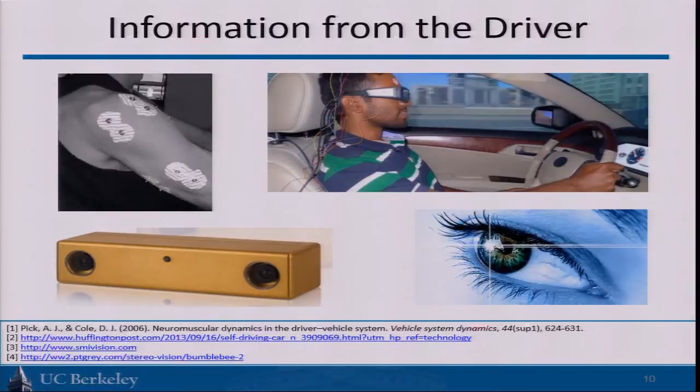You can also look at eye tracking information, which is what this video shows, a driver driving on a curve. You can see him switching between looking ahead into the curvature of the road and registering what the environment is. That goes towards a feed-forward model, predicting where he's going to go, and when he has a more fine-tuned feedback model, he looks closer to the front of his car. You can see this miniature switching behavior where he looks at a gaze point, tracks it, and keeps switching back and forth. So that's basically using eye gaze information to further tell us what's going on.

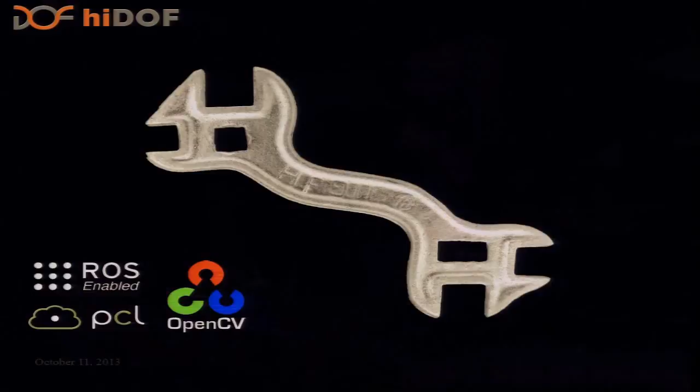And I found myself in this weird situation where I was asking myself, okay, so why? So what's the big deal here? We have a tool, and this is supposed to represent a tool that you might not know what to do with. I found myself in this position where I'm wondering, okay, we have this great tool set, we have all of these things that we can apply to all of these different problems, and I kept asking myself, well, but what's the problem?

So I found myself, along with a couple of my co-founders at Willow, struggling to find a nail for our hammer, I guess, so to speak. And we spent a long time just exploring different product trajectories that we might take. We all had aspirations to start a company.

And we had been told that the way you start a company in Silicon Valley is you find a product idea and you go out to many of the investors that are around Silicon Valley and you raise a VC round, and then you're good, you're golden, you're going to take your shot. But that wasn't happening for me, and it was sort of frustrating at the time. I didn't really know what to do.

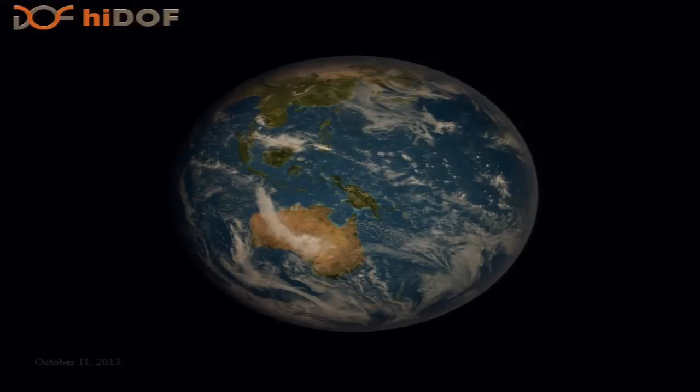But then over the last year or so, we actually entered the world, and we started to see this wide range of new and interesting problems that our technology was applicable for. We've taken a lot of time over the last year to get a high-level view of the space, of what's going on in robotics and adjacent spaces.

We've worked on technologies in autonomy for vehicles. We've worked on big industrial robots. We've worked on stuff in mobility and perception. We've worked on things in warehousing and logistics, and that's just scratching the surface. That's just in a year, and it's been a wild year in that sense.

But it does seem like there really are problems out there to be solved, and sometimes I think it's just hard to put the people who have the technology together with the people who actually have the problems. And I guess I'm advocating that consulting is a reasonable model for that.

Along the way, we also branched out into all of these spaces that I didn't originally think we would be in. My initial thought was that we would leave Willow and be firmly in industrial robotics, applying technology there. But it turns out that just robotics and a background in robotics is applicable to a way broader space.

I started to think, okay, so what is it that we're doing? If it's not just purely robotics, what is it that we're actually doing in the world? And it occurred to me that all of the problems we solve do have something in common. I think it's really important for everyone in this room today.